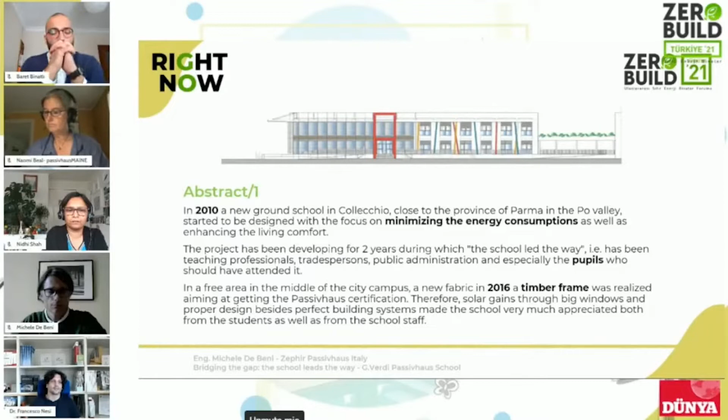Indeed, as you will see in the following slides, just at the end of this presentation, at the opening ceremony, even the governor of the whole region came to support the local administration and to present the school as an example of sustainability to the whole community, to the pupils, parents and families. And nowadays the director of the school is still very happy about how it works.

No major issues arose in the life of the school up to now. As reported, pupils get less ill compared to other schools. That's a major fact we can record as you invest in sustainability and in high-performing building standards such as Passivhaus.

Let me give the floor to Michele de Beni, and I will interrupt from here and there to comment, to make remarks on the project whenever I'm asked for. We'll present together this beautiful project, which has even been published in one of the major national magazines as best practice for the renovation of a school. So please, Michele.

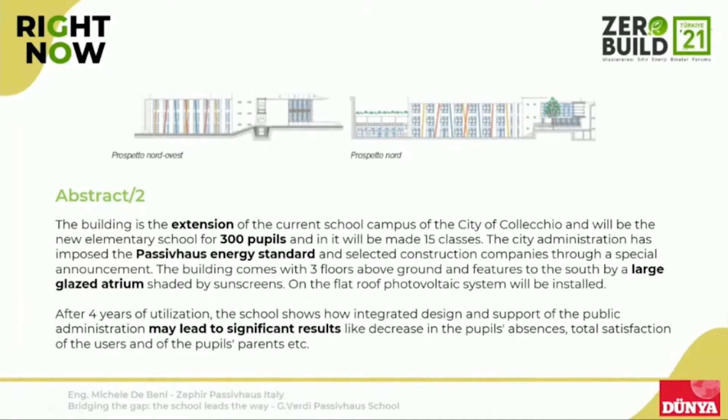You have to unmute your mic if you hear me. Okay, sorry. Francesco, can I share my presentation? Yes, please. Okay, just a moment. It works? As Francesco told us... Michele, I'm sorry, I'm not able to see your presentation yet. I see on my screen, just a moment. Okay. Now? Let's wait for a couple of seconds. Yeah, it's loading. There you go.

As Francesco told us, this is the story of a redesign of a project. The original project was quite old, from around 2010. It's quite interesting how a normal design can be turned into a passive design by working on many fundamental, basic aspects.

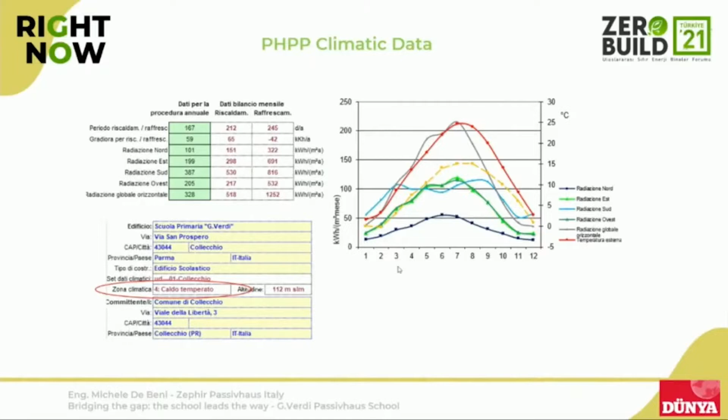The site is near the hill of the Apennines zone. The climate is temperate, warm temperate, and what is really hard is that in this site we have a long, cold winter and a hot, humid summer. So three different climatic conditions, quite hard to manage and balance throughout the whole year.

As I told you, we redesigned this project. We worked as consultants for the general contractor and redesigned the whole project. It's interesting that we used the PHPP as a sort of dashboard to focus and better understand where we had to work harder.

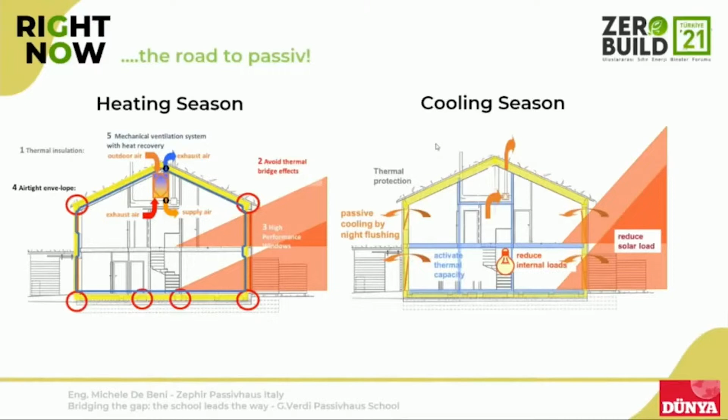Another interesting thing is that the building was designed trying to follow the same principles as a residential passive house. So even in the heating season and the cooling/summer season, we followed the 5 pillars of passive house design. Especially during summer design, we worked primarily to reduce the solar load from radiation, and we worked a lot on air tightness to achieve the energy performance. We didn't invent something different from the principle, which is important for this path - the passive house design principles are really relevant even for non-residential buildings.

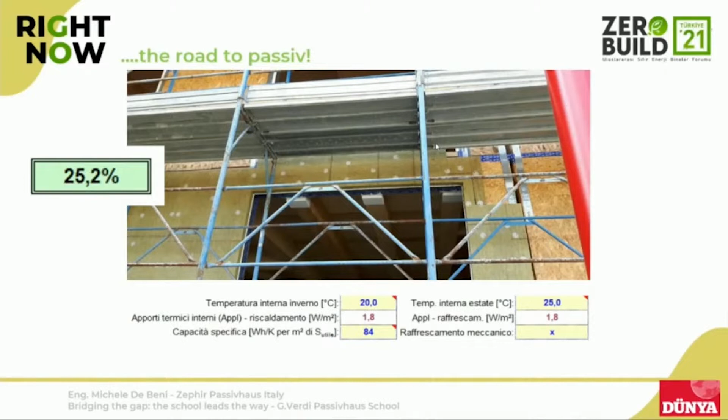In this case, we used really lightweight walls with just 84 watt-hour per Kelvin per square meter, which is quite low compared to the traditional way of building a school here in Italy with bricks, stone, and cement.

One of the first things we did was move the elevator outside the heating boundary. This was quite hard, but to have an elevator with air tightness certification is nearly impossible, or really expensive, so we moved it outside the envelope.

Another thing is that this extension is connected to the rest of the campus at one point, with one bridge. Another point where we worked to have a structural separation is the stairs for escape during fire emergencies.

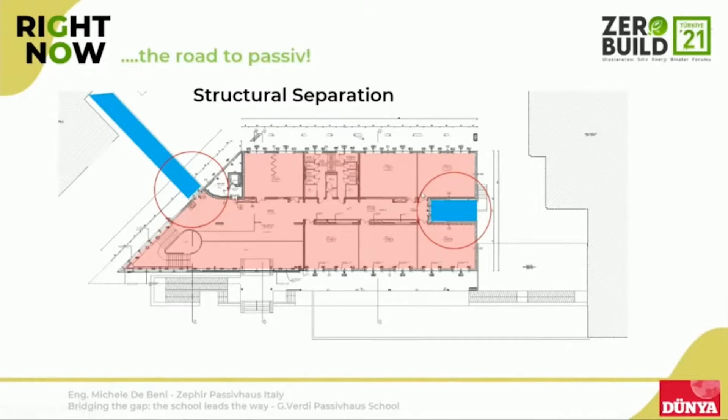Another point was to have a new vestibule in the main atrium to better control the losses from uncontrolled ventilation. That's quite important to preserve the energy of this huge atrium that you will see.

This is a section, and we put the technical room in the basement. The blue square is an AHU unit, and the rest are the 15 classrooms and other circulation areas.

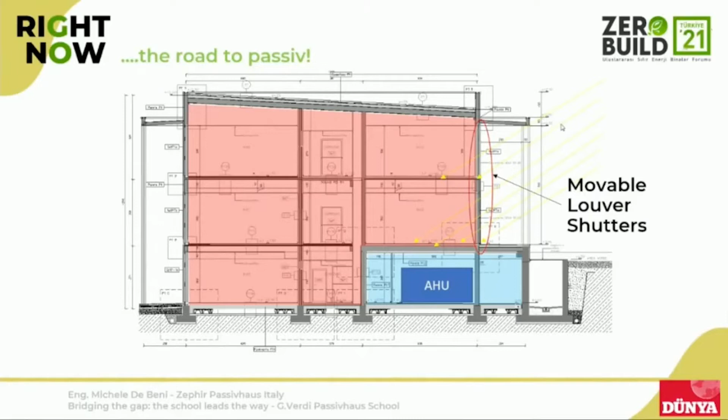On the right we have the south facade. The old project had an overhang shading that works well for summer but doesn't work at all in winter, and with the heating load that pupils and people generate during use of the building, it was really important to have shading during winter too. So we installed movable shutters on the south facade.

And to decrease and to work as well in the primary needings, we use a lot of natural light, not only in the classroom and in the atrium, but even in the circulation area. So we install sun tunnels on the flat roof to light all the corridors.

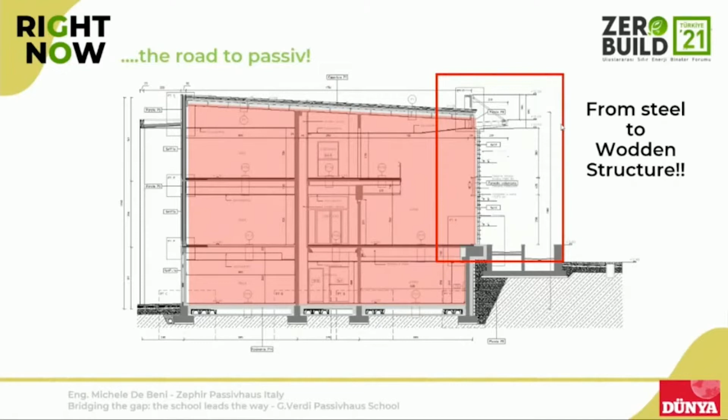This is the big atrium that works like a sort of huge gain of solar energy during the winter. Another thing is that we changed the structure of the atrium, which was in steel, and turned it into a wooden structure. That was a lot better for thermal bridging and other things.

Okay, this is the graph that shows you the TFA calculation. For example, the atrium was really a weight for this calculation, because the area was really high, but the TFA weight was not so high because there is a lot of floor lost in the double volume.

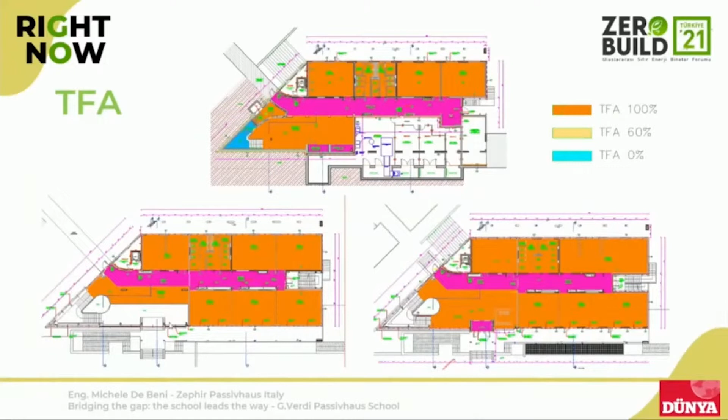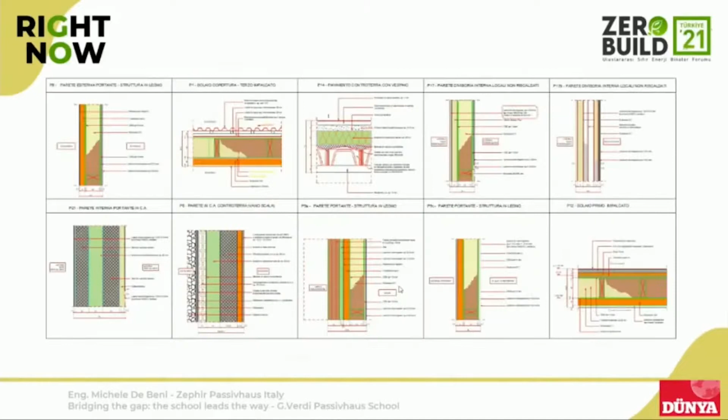What is interesting is the U value. The overall U value of all the walls is around 0.12, not extremely high prestige value, quite in the range of good insulation, but not exceptional.

So this is the external wall detail, and you can see the air tightness layer in the blue dot line.

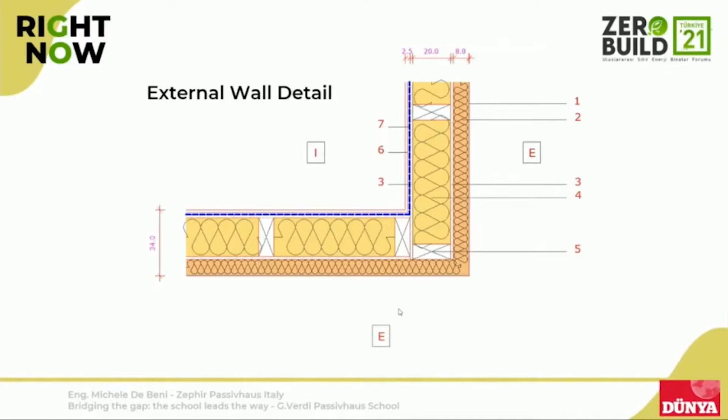The detail of the external wall with the flat roof. It's important that with a flat roof we use a vapour barrier on the inside, and then we protected the roof with a metal element as a covering.

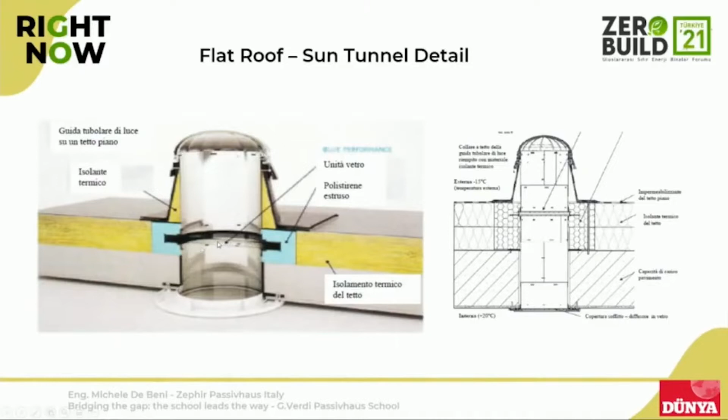This is the detail of the sun tunnel, which has an insulation element itself inside, and there is a glass that separates inside from outside. That is quite important for the condensation problem.

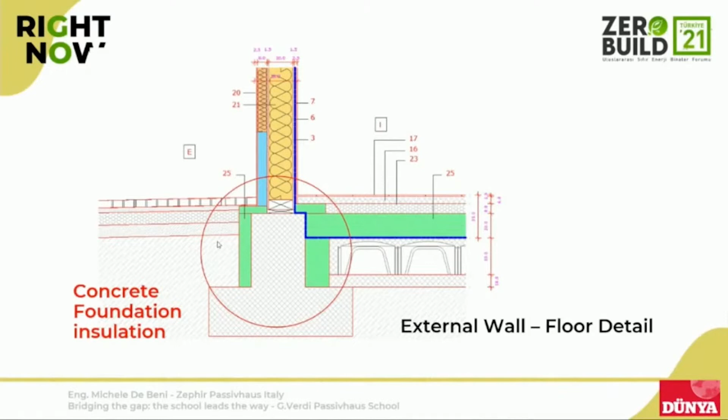And this is the detail between walls and the foundation, where we insulated all the foundation with XPS extruded insulation element.

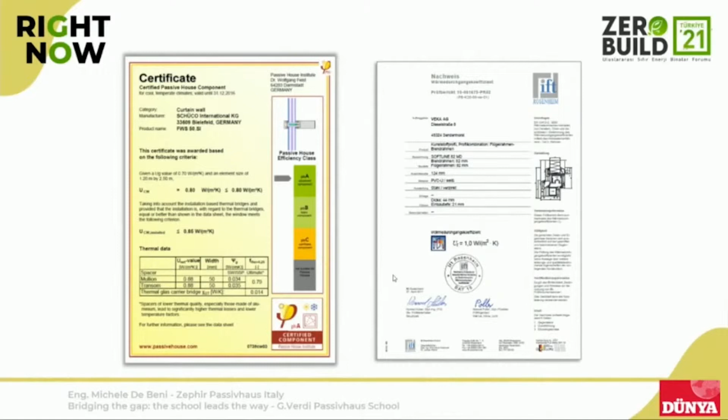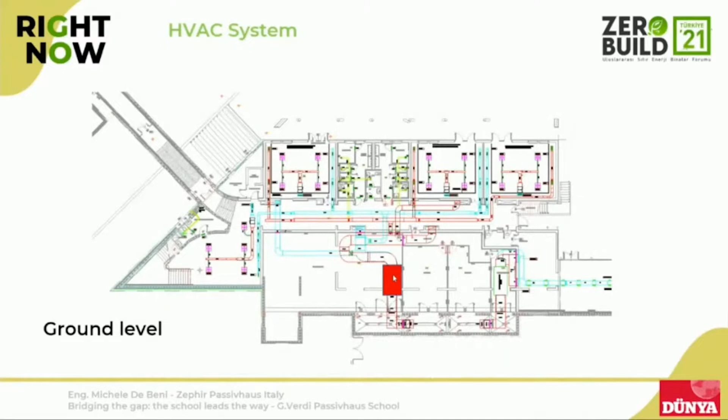Some analysis of thermal bridges. I go quite quickly through these slides because there are a lot of photos in the following. Thermal bridge analysis for the walls, for the roof, and this is a schematic idea of the HVAC system. So we put the AHU units in the basement.

What is interesting is that there was a problem between the south facade and the north facade, because a classroom during winter facing the south could gain a lot from the sun, whereas the classroom on the north didn't have solar gain at all. So we chose to split the heating power between the ventilation system and a recirculation system that allows you to manage each area separately.

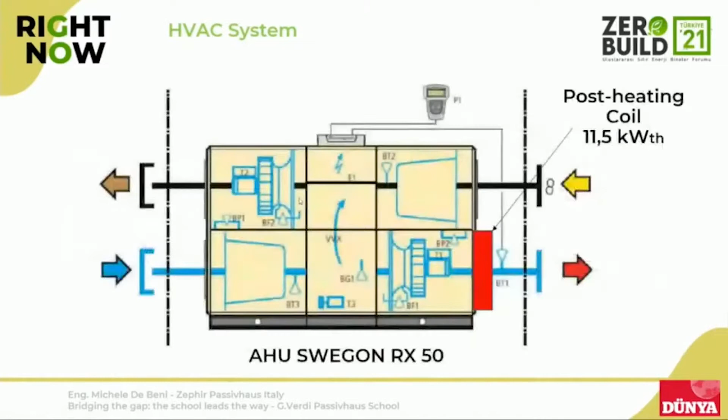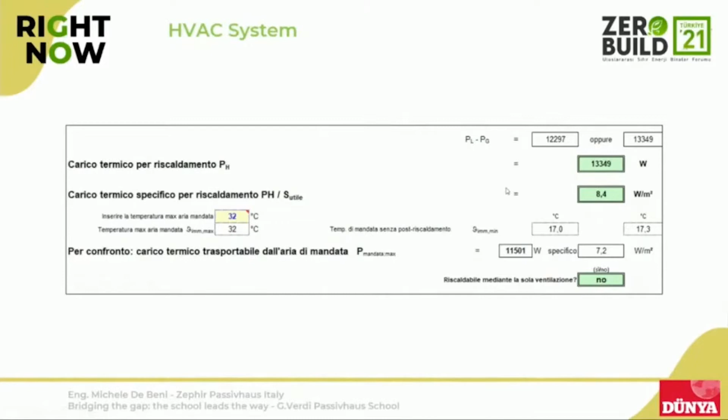So we have anyway a post-heating coil on the heating ventilation air unit, and this is another component with Passivhaus certificate. This heating unit has almost the power to heat the entire building, but we prefer anyway to have another heating system, a sort of turbo system, especially during the cooling season.

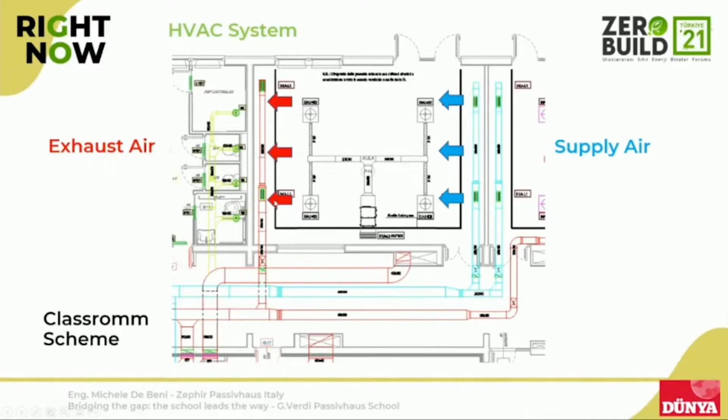Exactly, this is the air handling unit. And the classroom is a scheme of the HVAC of the classroom. You see there are supply air and on the right and exhaust air on the left, but there is another system that with recirculation can give you the power that you are missing.

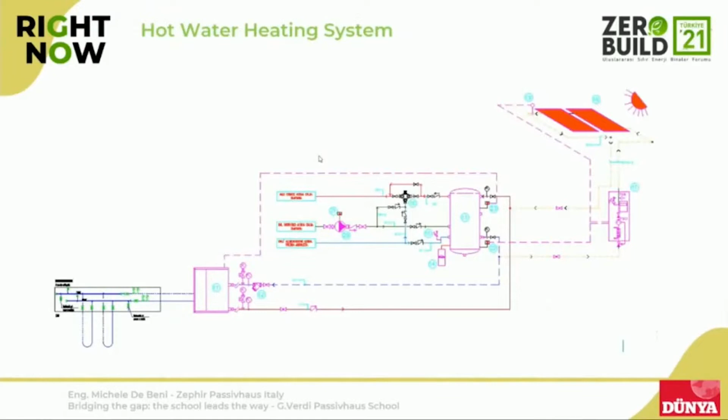So for the hot water heating system, we have solar panels and a heat pump dedicated just for hot water production. And that's the construction phase, the installation of the foundation.

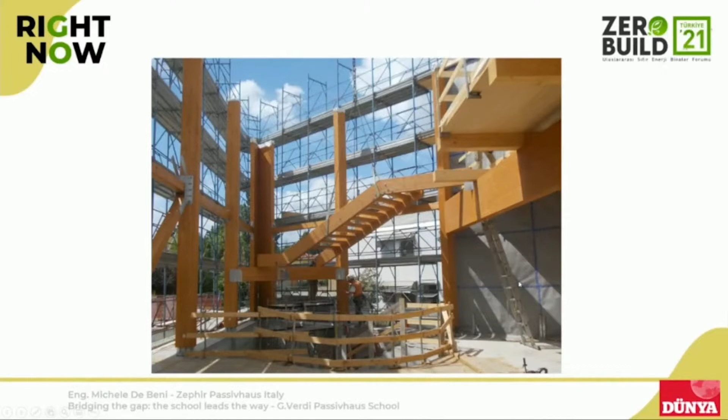Even against the terrain, and this is the wooden structure. You can see always the membrane with the tapes for air tightness. The roof, the precast wooden roof. The overhang element for shading, always made with timber, to decrease the heat flows.

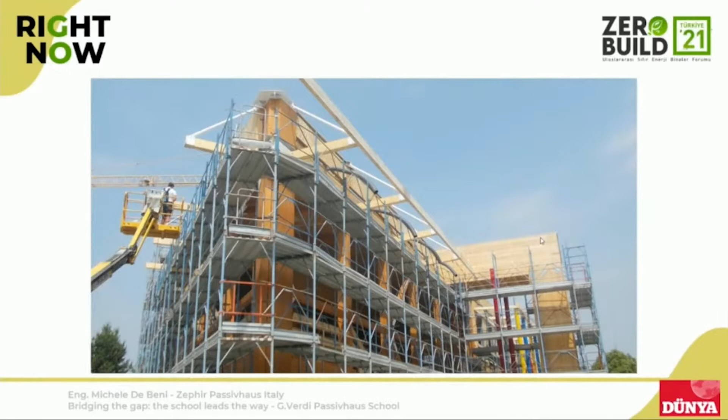For the connection, the external insulation with the mineral fiber, 12 centimeters. The insulation of the basement. And you can see here the tapes to connect the vapor barrier on the inside of the roof.

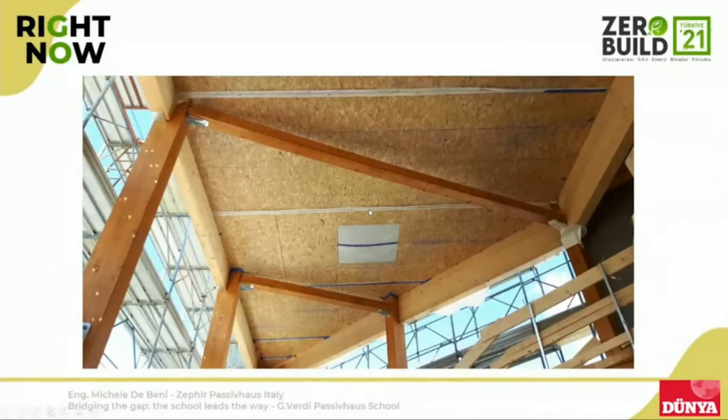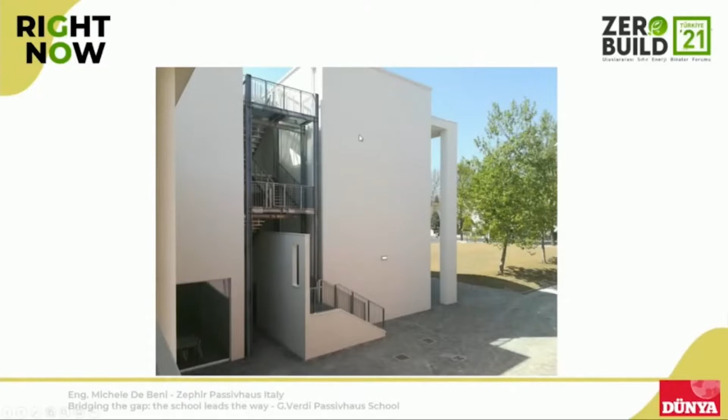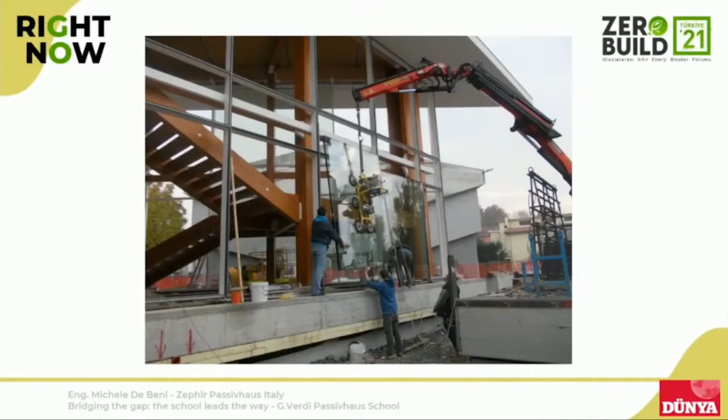This is the air tightness for windows. This is the vestibules of the main entrance. This is a photo about the triple glazing of the atrium, okay, with the curtain wall.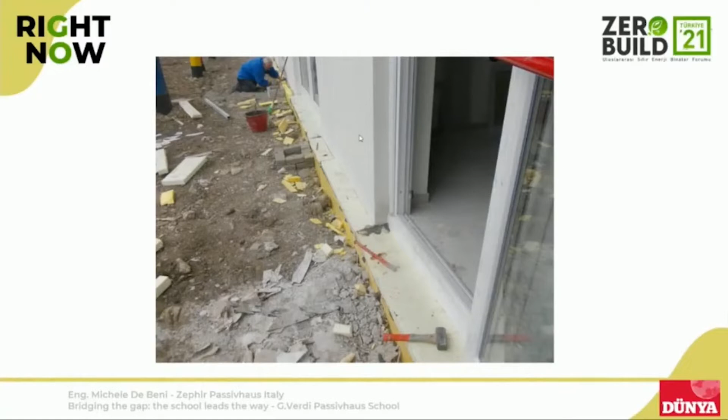This is the insulation of the foundation, the perimeter foundation, that is connected really in a good way with the external wall. Another insulation of the foundation.

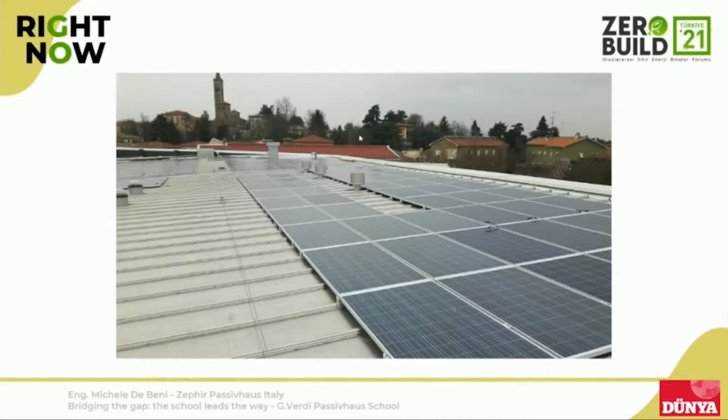The photovoltaic system, and there are the thermal solar panels for hot water. Many thought about the taping and the air tightness, the membrane between pipes and structure.

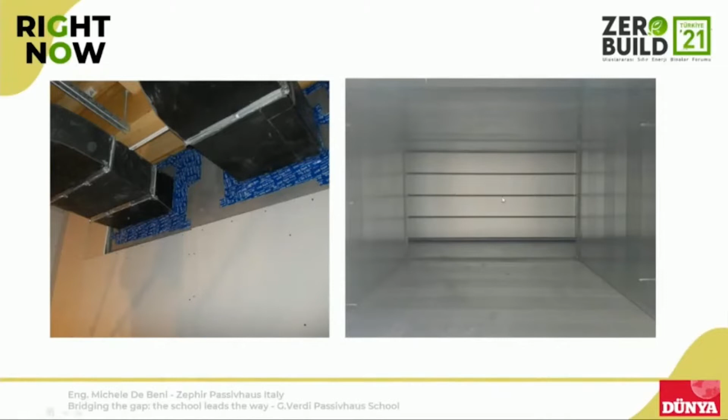This is to close the air unit on the right. You can see when you test the building with the blower door test, you have to close the air unit, and this is the element that closes the pipes toward outside.

Another element to pay attention to is the threshold, because all the doors open toward outside. So we use different levels of pavement or finishing to hide this threshold and to achieve the air tightness.

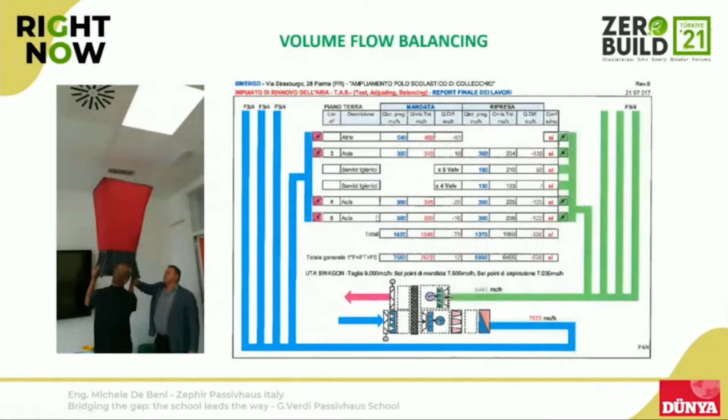This is a graph about the balancing of all the HVAC system that is required for certification. And this is the result of the test. We have to achieve to respect two parameters, the N50 and the Q50, one about the air change rate max and one about the loss for each square meter of the envelope surface that is required for big volume buildings for certification.

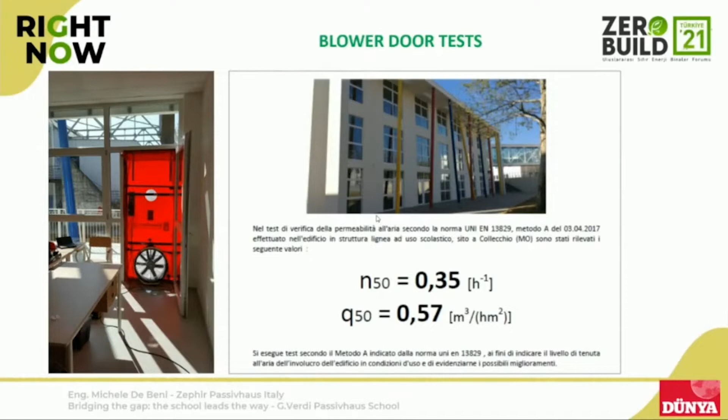Graph to use for this calculation, and many photos of the building at the end. The atrium and the connection between the new extension and the old building. This is the opening day with a lot of people really interested.

And the school, it's really not just important how much energy can save the school, that is really a lot compared to traditional building, but it's the message that this kind of building gives to the rest of the people. Inside the classroom, the main entrance.

Photo during the night, and that's the result. We achieved 12.7 heating need per square meter, and the energy primary index is really low, 36. That's quite important, especially with renewable energy.

We can't give the premium class just for a bit, but we achieved the plus. This is the Passive House Plus certification building.

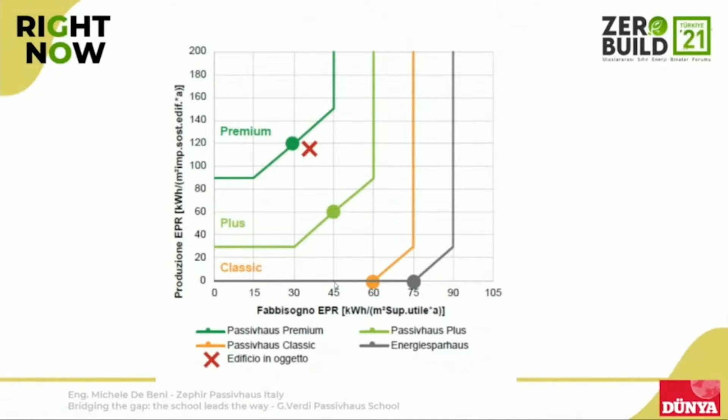So, Francesco, if you want to tell something about this common project and common experience, I can let you talk. Yes, thank you, Michele. I guess you explained it very well.

Actually, if you want to come back to the slide you were showing before, yes, here, this is the school director, the school principal. Of course, this is in Italian, but we can easily translate it right now. So he's saying the school of Collecchio, of this town close to Parma, is not only a virtuous building.

So within it, the pupils and the teachers are focused on fostering not only the sustainability made out of the materials used and of the school, but also the behavior. So a sort of change of behavior, which is more focused on consumption reduction through a very keen use of energy. So closing doors, opening windows for the necessary air change rate should be done only for a few minutes, since a ventilation system is already present.

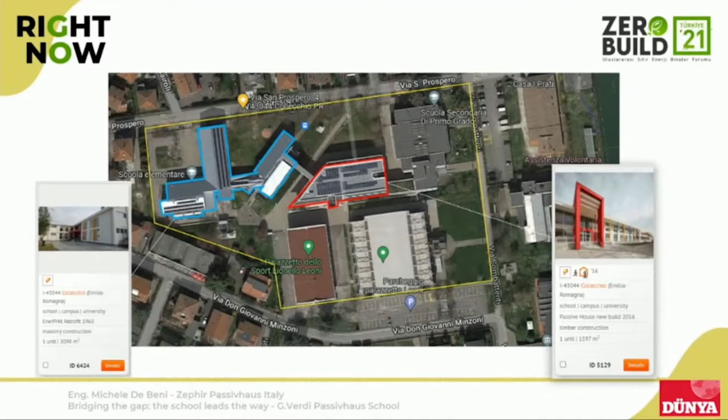As Michele was showing, the old block was also refurbished up to the EnerPHit standard, which is the Passivhaus standard for renovations, and this has been certified. I think this is the only town in Italy which has not only one school but two schools certified, and a really visionary municipality and public administration, which, as you can see in these pictures, is really supported also by the citizens, the local people, as well as by the regional and national government, as I told you in the beginning.

So the lesson learned: if a design starts badly, then you really hardly hit the target in the end. We should really sit beside the administration when they write down the tenders, the public tenders, and help them increase the quality of the tender and of the project, which will subsequently be implemented on site.

And of course, all the designers should speak together and possibly the same language, in what is called integrated design. So the Passivhaus standard is reliable, as proven by the numerous testimonials given by the pupils, the director, the government, and so on, which tell us: look, we have really great performance, not only regarding comfort, but also the bills.

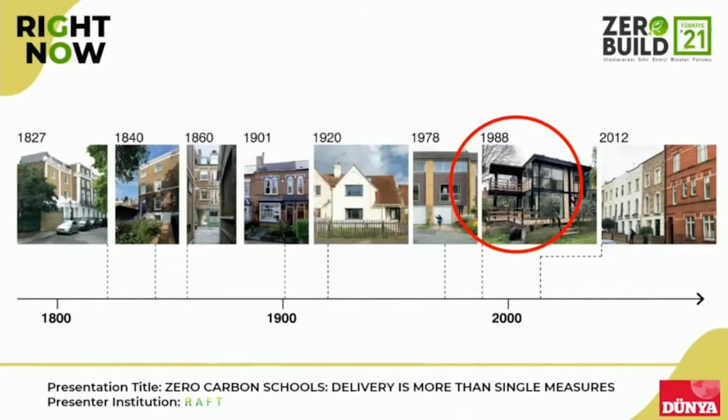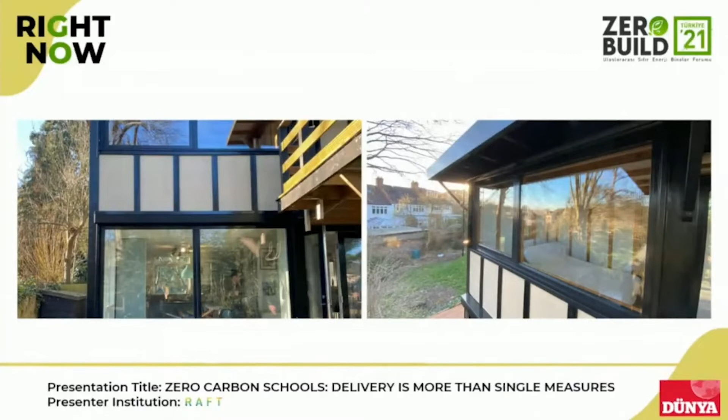We have recently finished refurbishing it by using bespoke solutions again: triple glazing, air tightness. The front panels or cladding panels were removed, and aerogel insulation fitted behind it. Internally, it's got wood fiber insulation. It's also got regenerative MVHR, which we thought was really cool. It looks really neat and decent, and it's decentralized.

So it's perfect for this particular house situation. And then it's all that experience that we now bring to our schools. Schools in the UK have had various points of growth—in the late 19th century, between the wars, and then in the 70s. So we see lots of different building fabrics, lots of different types of schools with different history, and so a different regime of maintenance and upgrading as well.

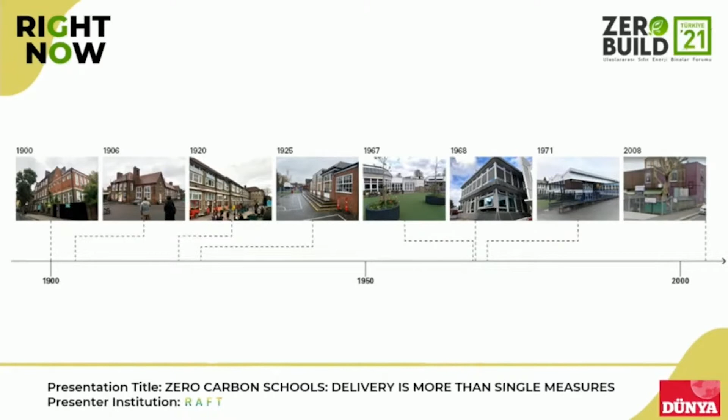So if we then go into much more detailed study of the schools that we work with, we look at the whole history of when the repairs were done, when any maintenance activities were carried out, when extensions were built, to form a picture and understand the building first before we start working with it.

In the UK, there isn't much new school building activity going on at the moment, but there are over 35,000 schools that all need retrofit. We have a program of reaching zero carbon in each and every school by 2030, so we are going to see more retrofit action than new build in schools in the UK in the next few years.

That brings us to these three particular schools, which I'll share—we're doing some work this year, but before that, it's how we started. This particular house is Harry's house, and it is the first step-by-step retrofit project that has reached EnerPHit standard. It's won lots of awards here in the UK and abroad, and this is where we honed the technique of achieving that step-by-step retrofit. This house took 5 years to retrofit, and we've been monitoring it continuously.

It's been pre-monitored before retrofit measures and throughout the retrofit measures, and is now being monitored as well. We looked at embodied carbon, and community engagement with local schools was very important, because we wanted this to become like a laboratory for learning, and we wanted the whole community to learn from it. The materials I used, everything was logged, and Harry's son Dimitri produced lots of posters and leaflets for the school for the whole process, and that was shared. The tree in the garden was taken down and air dried over 2 years, then the fence and decking were made out of it. So it all kind of—the embodied energy was really important.

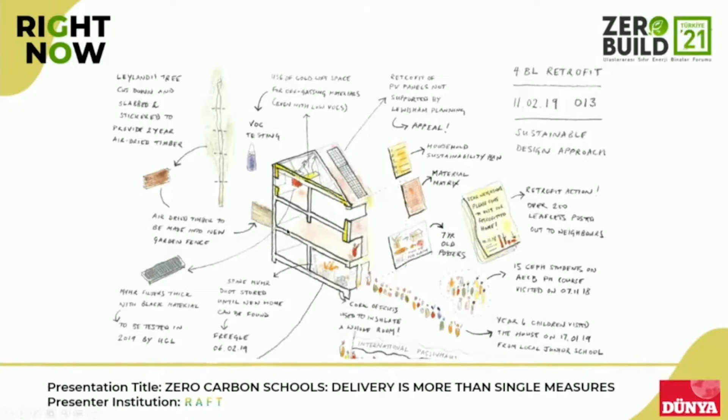This is again at the school where we're teaching. The engagement with schools is a major part of what RAFT does, and we wanted to teach them about thermal properties and thermal elements. So they're working with different insulation materials in groups, and this is what we call the baked potato challenge, where they're all given a baked potato and have to build a house for that potato to keep it warm.

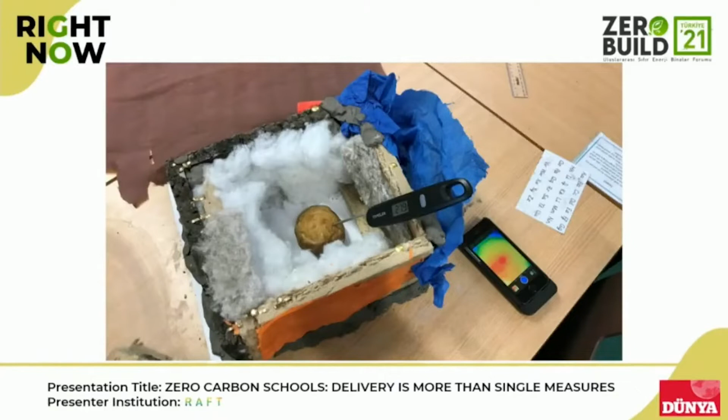After an hour, we go in and take thermal images throughout the process, measuring to see whose potato is the hottest. Unsurprisingly, in a very endearing way, we always see that people forget to put any insulation on the floor, which kind of mimics what we do in real life as well. So that's quite interesting, and that has led to a whole school assembly approach.

So we go to schools, we want the whole school to be involved—it's not just going and delivering one single measure of retrofit, or a range of measures, but getting the whole school involved in what's happening. In most cases, we start with the impact that climate is having on us and why the works are first necessary.

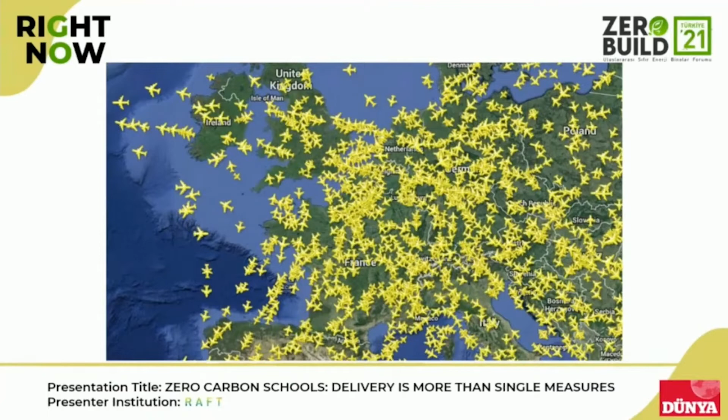This is one slide which we produce every time we go into a school—it shows the flights coming in and out of Heathrow Airport on that particular morning, each flight and the tons of carbon it has produced, and the real-life impact of these carbon emissions on various parts of the world. Climate justice is very important to us, as I mentioned before.

And we teamed up, in one of our school retrofit projects, with a school in Bangladesh, where children then exchanged letters.

So the school in London is writing to the children in Bangladesh, the school in Bangladesh is writing to children in London, and then the child in Bangladesh attended an assembly that happened online at the school in London as well. So there's a whole exchange of how climate is actually impacting the whole world and why we should be changing and retrofitting our buildings.

But this has also hit home to us this year, because this school in London is actually a colleague's son's school, which has flooded, and there was huge disruption. It was shut down for 4 weeks. I just want to go there and turn the lights off, but I can't.

It has really hit home to us, and we've seen news headlines like 40% of schools in UK are now at flood risk, or are in low-lying areas at huge risk of flooding. So this has led us to expand our scope of zero carbon services, in which we now also look at SuDS. That's another thing we've got involved in.

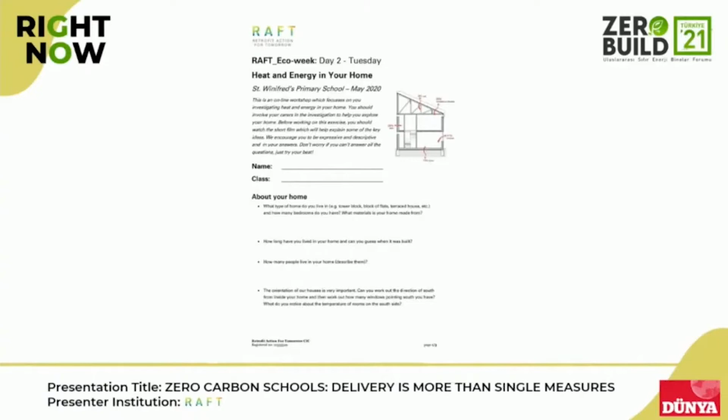This is a little video of Harry's son, showing one of our workshops where we asked students to go and do a home energy audit. Here he is explaining how to fill out the home energy audit in their home. We work with the children at school where the retrofit is happening, so they can transfer that learning to their home. It is that ripple effect, with the whole community getting involved.

We work with school children on a different kind of workshop as well. We look at the waste the school is producing. We get them to do a waste audit and see where they can cut down on their waste to help reduce their carbon emissions. So we get them to do this.

We look at food waste, and when this happens, the children usually just run away. But we want them to understand how they're prepping their meal, how they're designing their menus, why there is food waste, portion sizes, and things like that. A typical school can produce up to 20 kg of food waste a day, which is 8 tons over a year. If you consider there are 35,000 schools in the UK, you can imagine how much food waste per day and per year. That is another thing we really want to have an impact on.

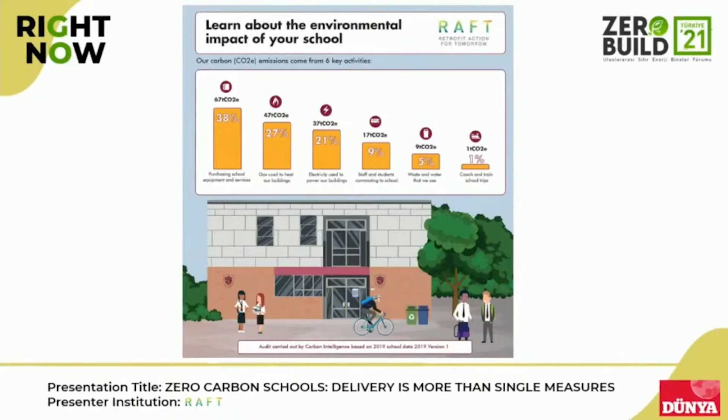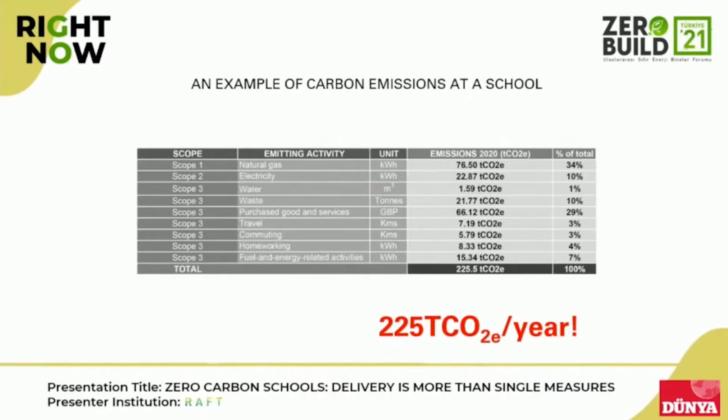It's quite surprising, because when we brought the building down to zero carbon, is the school actually zero carbon, or is there anything else required? There's so much more required for the school to actually become zero carbon, because building energy is just one aspect, and purchasing is actually equal to the heat and hot water demand of that building. There's an equal amount of carbon associated with it. So we want to target that as well, and work with scope 1, 2, and 3 emissions, trying to get the school down to a true zero carbon. And while we're doing it, air quality is also very important to us.

So we don't want to leave school in a worse condition than we start with. So when we are in there, we want to monitor the air quality. We give schools these air quality monitors so they can monitor their classrooms, and in some cases we've now actually installed sensors as well, in 4 schools now.

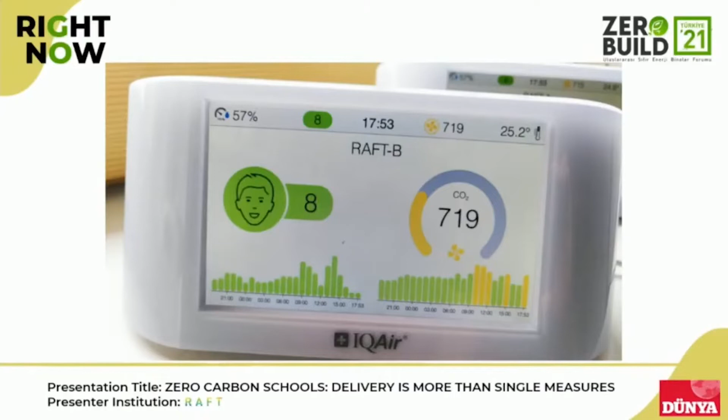It is because the indoor air quality with piecemeal measures is so bad. You have double glazed windows that cannot open properly, or have got blocked trickle vents, and it leads to CO2 accumulation in the classrooms to such levels that their understanding, their concentration is impaired.

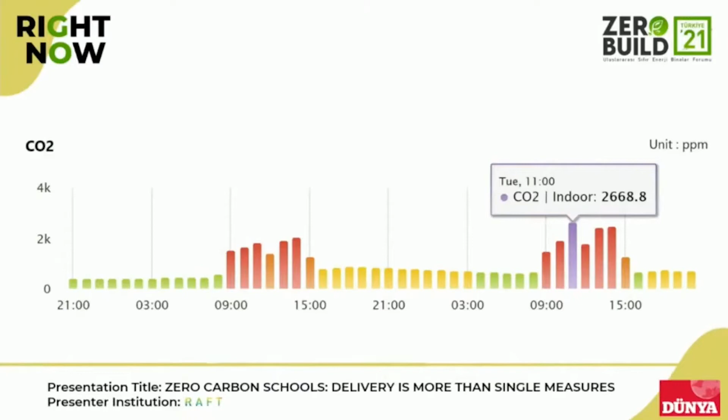In our measurements of that ventilation and CO2 in the classroom, we've seen that the CO2 can actually reach over 2,500 ppm, and it impairs the children's ability. So when children are falling asleep after lunch, it's not their fault - it's because the indoor air quality in the classroom is so bad.

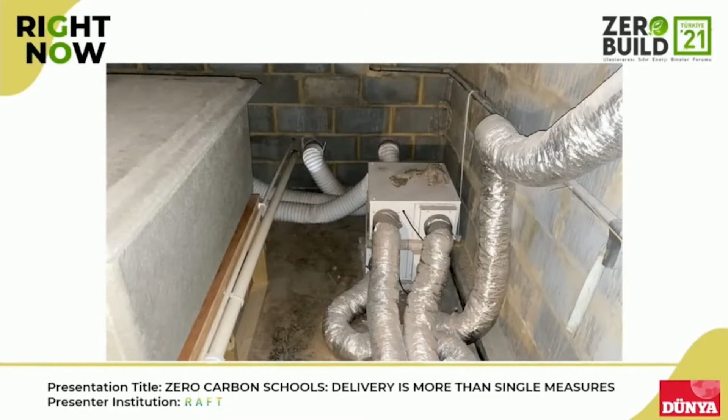So we worked with a music composer, using the monitoring data that we collected from each classroom, and it was a 3-day workshop where children understood what that monitoring data was, but also composed a musical piece out of that data. So that gets them really involved in what's happening in their school.

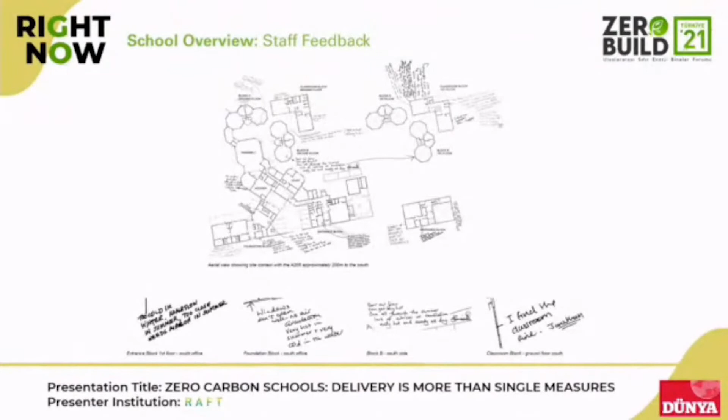Building fabric, again, it's a forensic analysis of the existing building fabric. So we go into a type of detail, look at every element, look at what's happening, what has happened over years, how occupants are actually experiencing the existing building, which is really important, because most of the time things are done to them by people who are not even involved in the day-to-day running of the schools, and hence fail to understand how people actually use the school. And that can lead to mismanagement, or spaces not being used the way they should be, or equipment not being used the way it should be.

And in further investigations, we come across these type of things really often, where the loft insulation is just been ripped off, and it's piled up in one of the corners because there was some services installation or repair work being done in the school, and they forgot to put the insulation back.

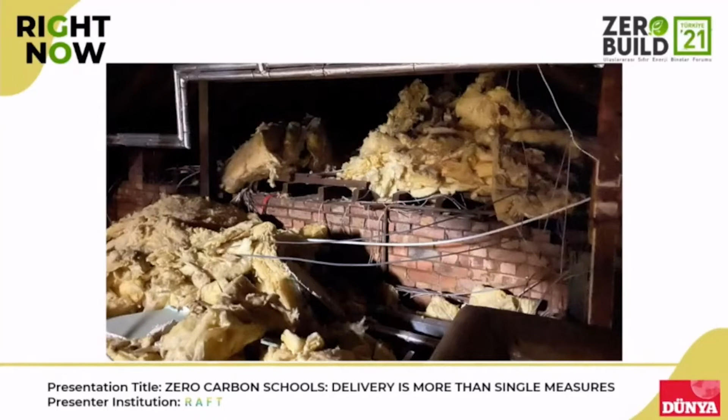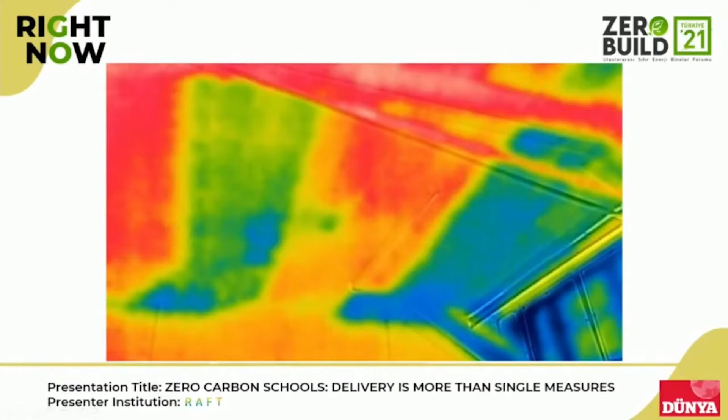Or things like this - this is a thermal image of a loft, and it has got a walkway around, so there is no insulation being installed where the walkway is, or nobody bothered to pull the boards up and install any insulation there. So there will be huge thermal bridges and leakages.

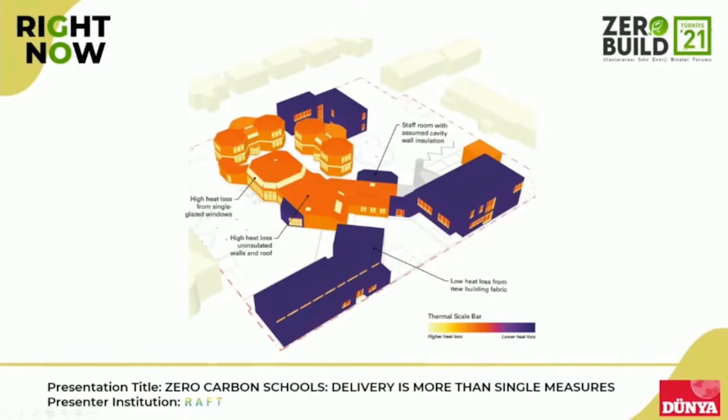We use Design PH and PHPP to analyze the buildings as well - three of us are passive house designers. So this is the heat loss analysis, a visualization showing the heat loss of the building. The yellow bits are single glazing, and this allows us to evaluate the building.

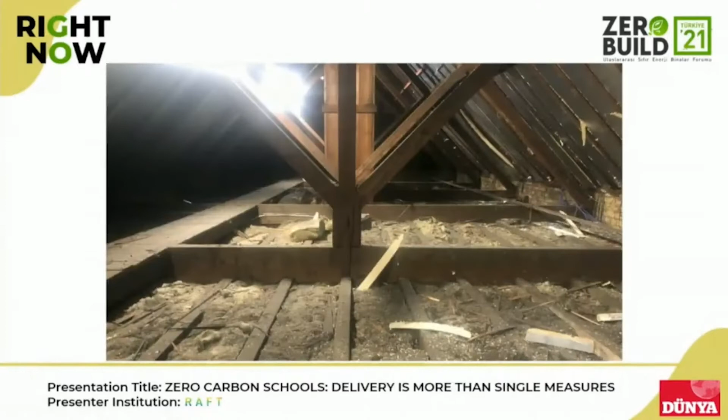This is the same school. There is insulation installed at loft level, but sometimes it's well-meaning measures, badly installed and not clearly thought through. So you've got the reflective side of the insulation on the inside, and this is actually an unheated space - there was no need to insulate there, and it was also poorly installed, so there is thermal bypass. We come across these kinds of things very often in school buildings.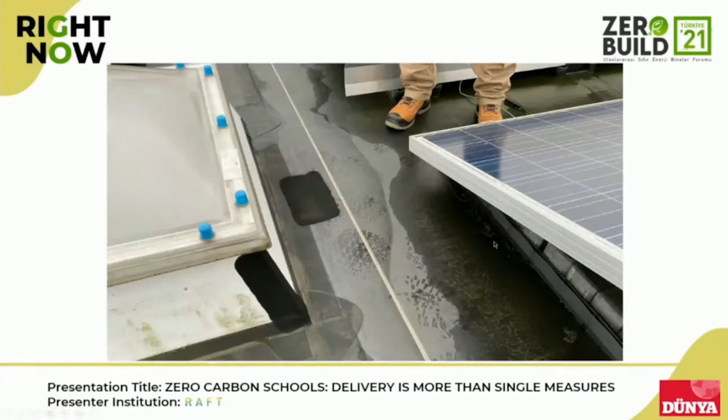But when you look at the roof as well, it's like a patchwork, and you can see - you actually step on it and the water just splashes out, like a fountain of little water. There is so much water under this membrane, and every time it's been patched over, but the water has not been let out. So the insulation is actually sitting inside a waterbed and obviously not performing.

So new buildings to regulations, but still not performing as they should. The solar PV is also switched off because the solar PV meter is in a classroom and it was heating up too much - again, not clearly thought through in terms of where new equipment and measures should go.

This is again a concrete ring beam, so a huge thermal bridge. We developed a bespoke approach to it, receiving some aerogel insulation at that particular junction. It doesn't remove the thermal bridge, but it definitely takes it down to a manageable level - it's not a condensation risk anymore at that corner.

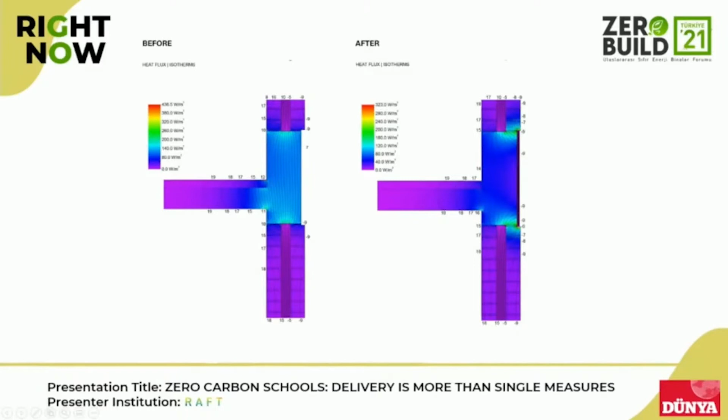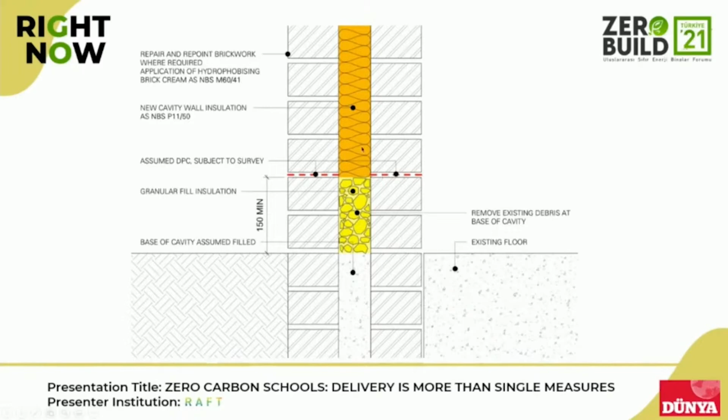Again, this is a bespoke detail for cavity wall insulation, where just to remove the rising damp and other issues, this is a foam glass granular fill below the DPC, and then regular insulation on top.

And over here, we actually thought there was a huge structural problem on site, and the brick on the sill and the lintel were spalling.

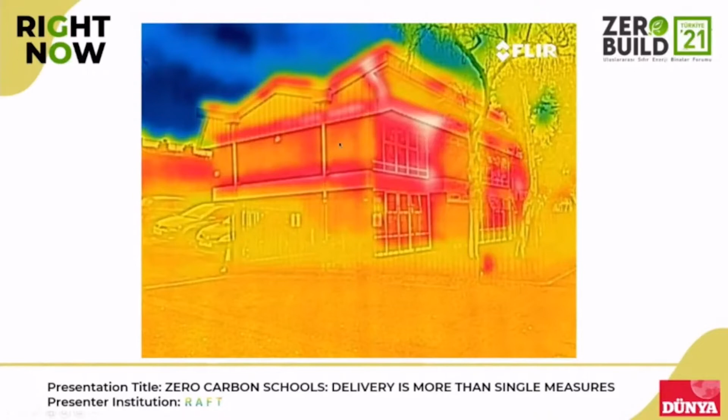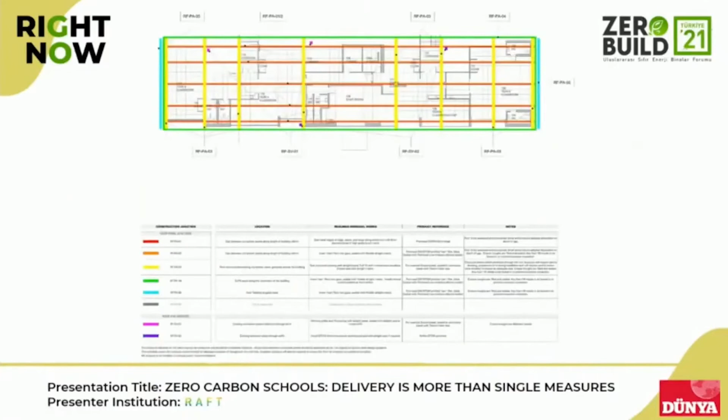In this case, the roof is actually a newly installed roof from 2019. We went into the school and took thermal images, and we were shocked to find that you could actually see daylight and hear things through it. The junctions are not properly sealed, so we had to develop a whole new airtightness strategy for something that was just built last year.

And this is an engagement with the building fabric. We get children involved in airtightness, in thermal imaging, and understanding their whole school before any measures are applied.

This is again a whole school where the head teacher got really involved and was really excited, and she laid out all the archival material that they had, and the children were given white gloves to go and have a look at all the material. These are certain elements of historic interest, and we let the school keep them.

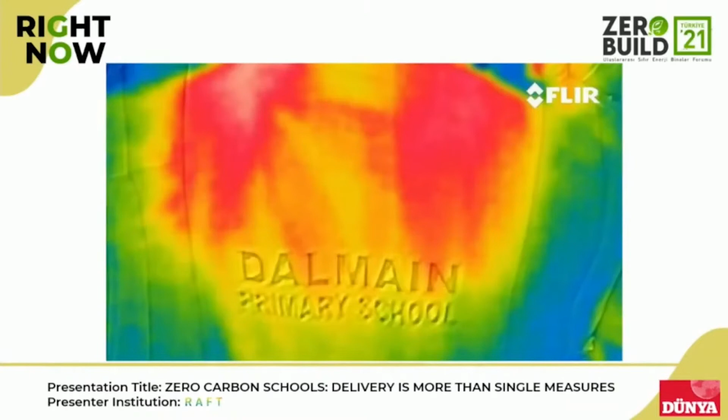We do a 'follow the heat' workshop with the children, where they follow the radiators and the heat from the classroom into the boiler room. They were allowed into the boiler room and they actually recorded the sound of the boilers, then came back and made a presentation about it - a sound of carbon emissions. That was quite profound.

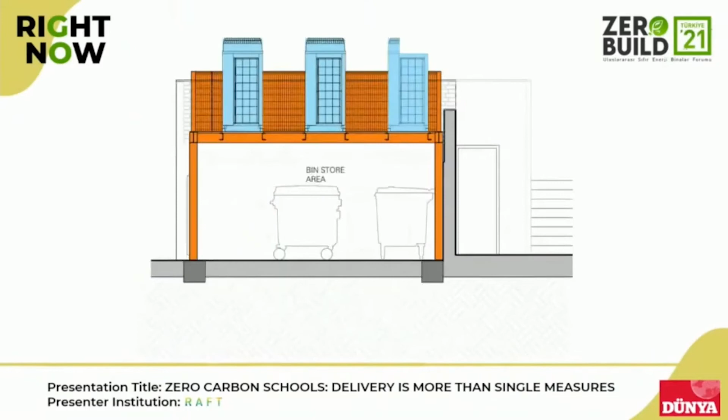We then looked at all the different options for air source heat pumps. In most cases, the obvious routes are not the best routes because schools have other priorities, and so in the end we had to design this new support structure for the ASHP units.

Again, in the same school - this is a very nice story. We had initially proposed an air source heat pump here, and when we did a consultation with the children, they were really upset because this was their favorite corner of the school. One of the girls stood up and said, 'This is my throne. I sit over here and sing. How can you put something over there? You can't take it away from us.'

So we had to look at different things.

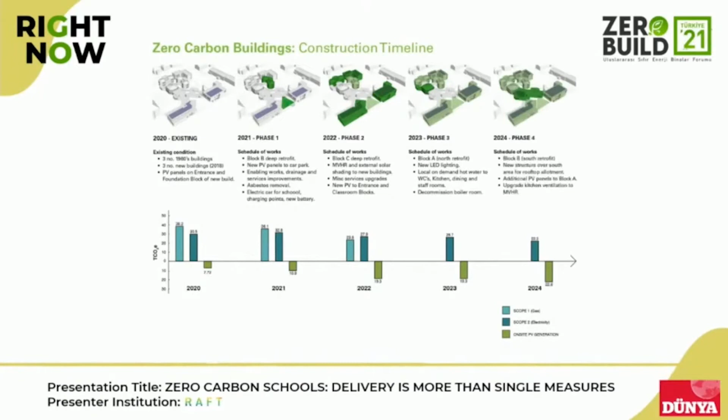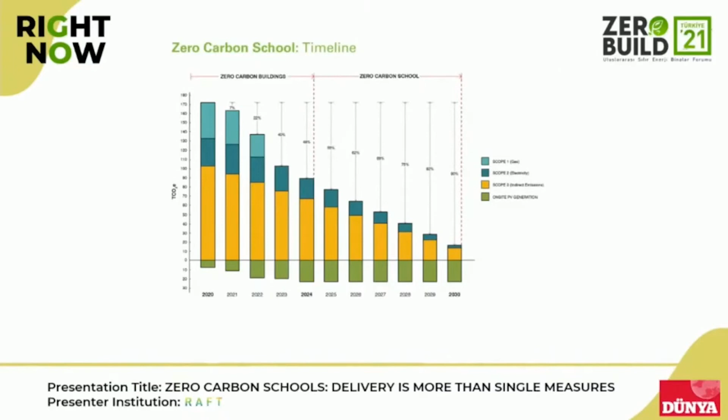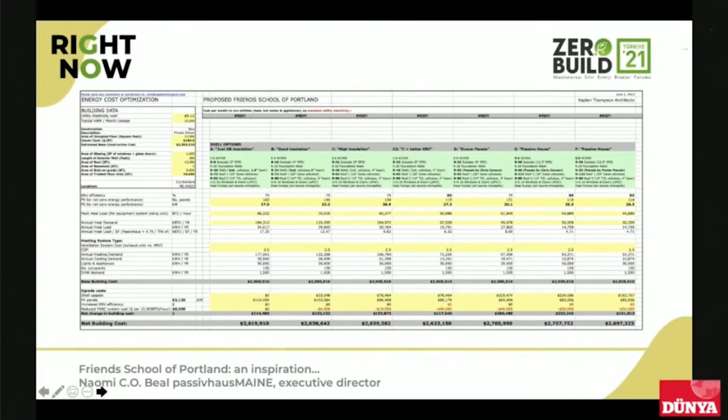The board decided to aim for passive house but not commit to it up front, because this was almost 10 years ago, when passive house was still new and not super well understood. I was very careful wearing my hat as board chair at Friends School and also my work at passivhausMAINE—I didn't want a conflict of interest. So I let the building committee lead the way. We said, okay, we're going to aim for passive house but not commit to passive house.

Rather, we took this approach of design without eliminating passive house as a possibility. That was a really interesting design exercise, which started at the very beginning when we were deciding where to actually put the building. We had a few locations on this raw wooded site.

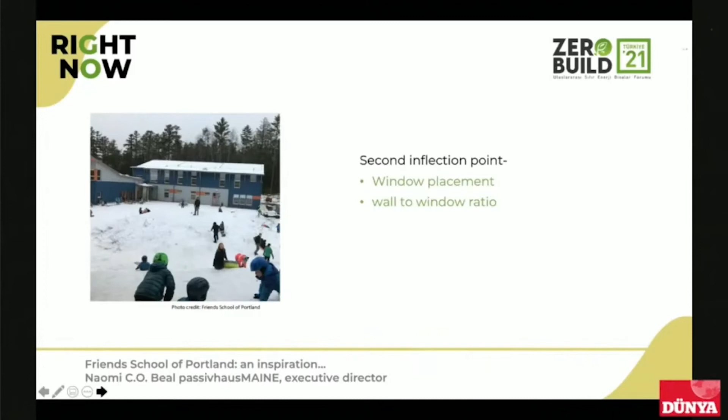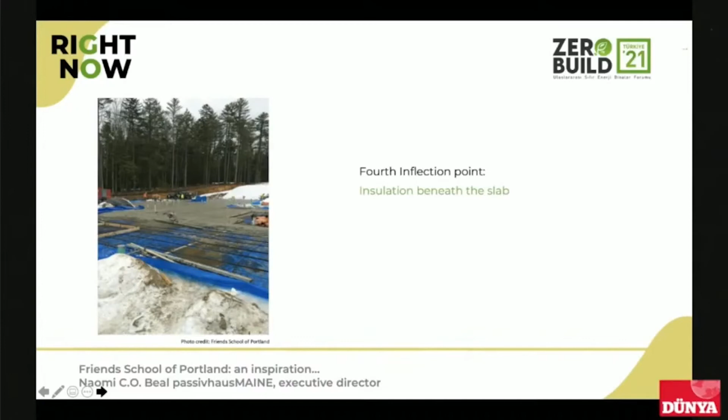But in the end, we realized that if we just added a couple more inches of insulation beneath the slab, we would reduce energy load just enough to reach our Passivhaus certification goals. That was a huge conversation for our board - is it worth adding more foam insulation to reach a sort of abstract goal of building certification and get our plaque? The board decided it was that important, important enough to add a little more foam, which actually raised our carbon load relative to our energy load, just from more foam.

But it was important to make a bold statement to our Friends School of Portland community, but also to the greater Portland community, the Maine community, our regional community and a global community - saying Passivhaus, low energy, this very careful attention to building design is the way of the future and how buildings should be done. So Friends School committed to this. Obviously all of these decisions were made before any shovel was dug into the ground, before any building was actually done. They committed to the design, and as a result we had this beautiful building.